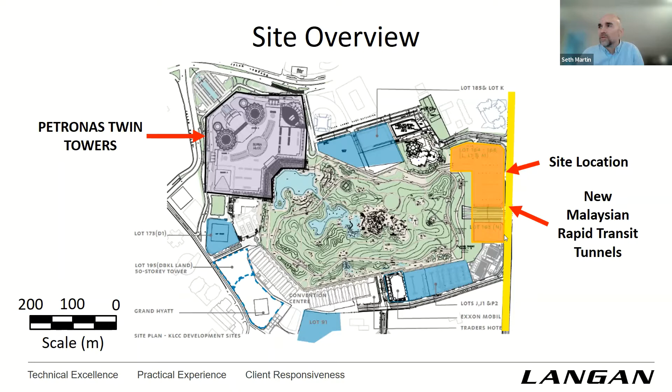One of the big challenges with this site is there's a new Malaysian Rapid Transit system that will be in place — this yellow line running up and down on the screen — that will be in place when this tower is constructed. So that was a big challenge from an overall site constraints perspective. We'll get into some of the other challenges with the overall ground conditions.

So the proposed development — just to go through some of the metrics of the tower itself — it's a 700-meter tall tower, about 150 stories. Total weight of the tower is 9,000 meganewtons. Each of the individual mega columns around the perimeter will each have 400 meganewtons. So the scale of this is pretty incredible.

The system is a piled raft. We have a 70-meter square, 5-meter thick reinforced concrete raft over a field of 137 2.5-meter diameter bored piles, ranging anywhere from 60 to 105 meters below the bottom of the raft, and up to about 125 to 130 meters in some cases below existing site grades. So some of the deepest piles in the world.

The current status is the tower is not constructed. The foundations are all in, the basements are all excavated, and at this point there is a pretty long horizon for constructing the tower itself.

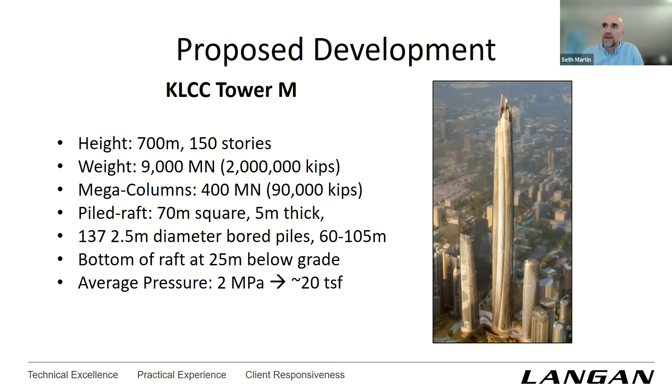Overall, the MRT had very specific criteria that we had to meet. So we're putting in this massive tower, massive foundation system, and we have to look at how that's going to affect the tracks and the overall structure itself.

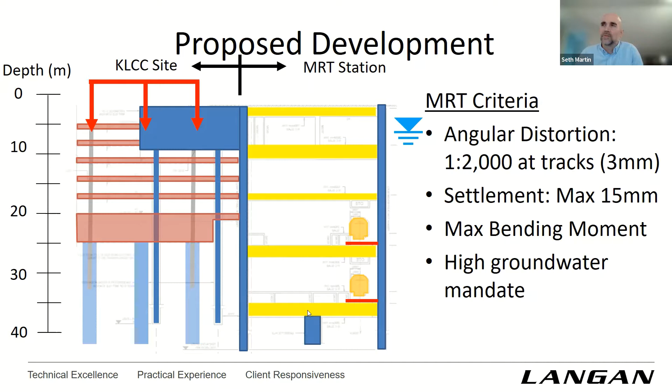We had settlement criteria, angular distortion criteria here listed on the right-hand side. We were looking at the overall surcharge and bending moments and shear forces in the diaphragm wall here. And then we also had to look at how the groundwater levels at the site would affect the overall performance of the structure. So a big first piece for our approach to a project like this is the site characterization.

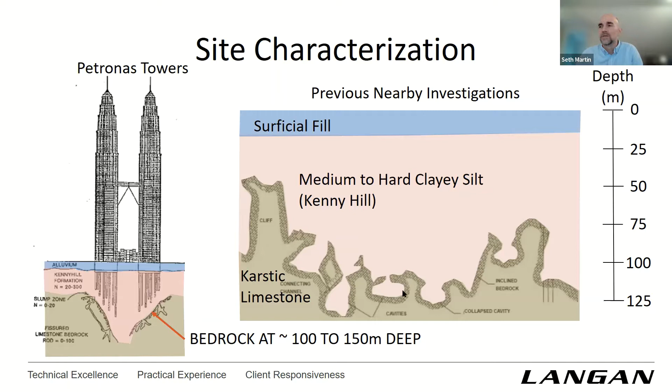We know from previous work at the site and published work with the Petronas Twin Towers that this is a very challenging geological condition. There is a karstic limestone that underlays the site, and this limestone is essentially water soluble, so it's going to have various erratic profiles and cavities, rock pinnacles. We've seen towers at other sites where there's rock drop-offs as much as 50 meters within a single tower footprint. So very challenging conditions — that's going to require a robust upfront site characterization.

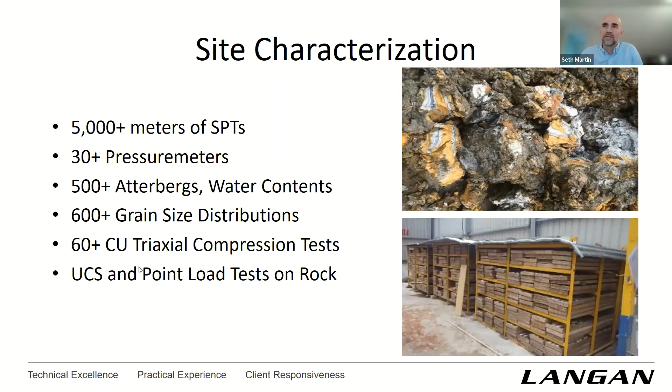Just again, some of the metrics of the overall site characterization here — we had 5,000 meters of SPT drilling, pressure meters, and obviously a wide range of lab testing: strength, compressibility, and index testing.

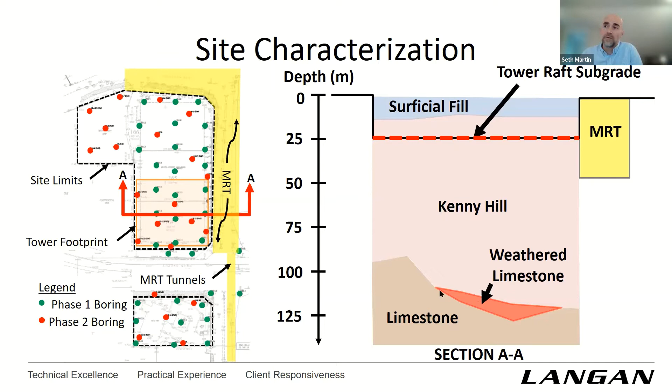Through that investigation, we identified this weathered limestone layer, or what we thought was a weathered limestone layer, across the tower footprint. The key here is we then proceeded with the analysis, proceeded with the design, and ultimately got into a construction phase investigation.

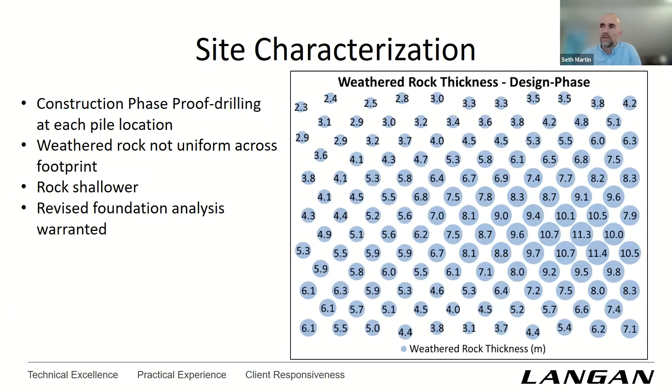Through the construction phase investigation, two pieces there: one, this was a different contractor, and two, it was generally just a better quality investigation. So what we found through doing these proof drilling points at every pile location was that the weathered rock was actually very sporadic.

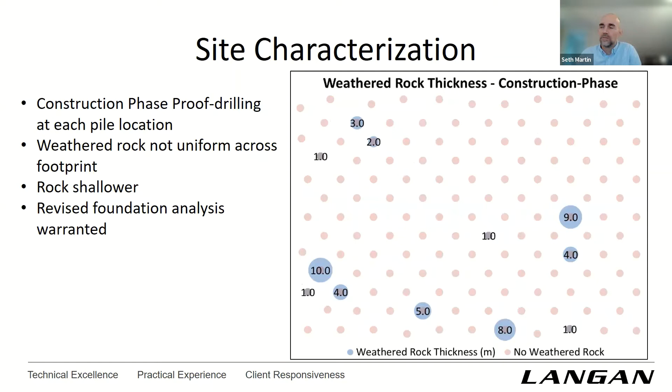And it was not a consistent profile across the tower footprint. And so the key there is that this is going to obviously affect the overall tower performance, so that had to be evaluated prior to drilling of all of the production piles. Overall, it was a savings in the scale of the drilling.

Here we're showing the estimated pile lengths based on the proof drilling versus the original estimated design pile lengths from the original investigation. Any of the negative numbers indicate a reduction in the overall pile length. Here we saw rock was a little bit shallower, quite a bit shallower, up to say 18 to 20 meters shallower, and here rock was a little bit deeper.

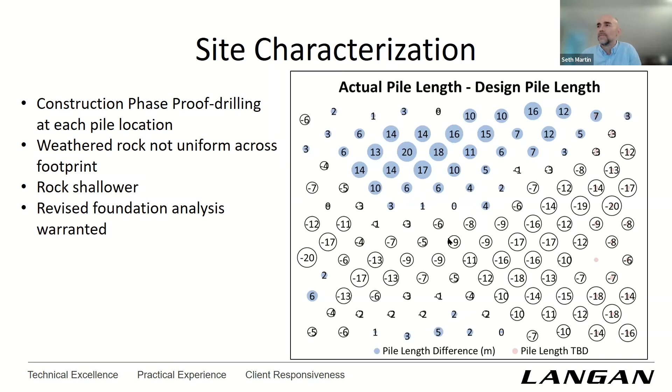So again, this warranted additional analysis, but overall this was very beneficial to really fine-tuning the production pile drilling quantities.

And the overall takeaways, just to put numbers to it: we ended up with 400 meters less of pile drilling than what was originally estimated based on the design phase investigation. Another big takeaway was this weathered rock zone was essentially non-existent except for some very local areas, and that resulted in a softer raft response.

Which was again very, very important to evaluate prior to construction. So we did observe additional settlement in our analysis, and that put an increased demand on the raft, so this had to all be accounted for just ahead of the production piling. Thankfully, the settlement criteria at the MRT was still within tolerance.

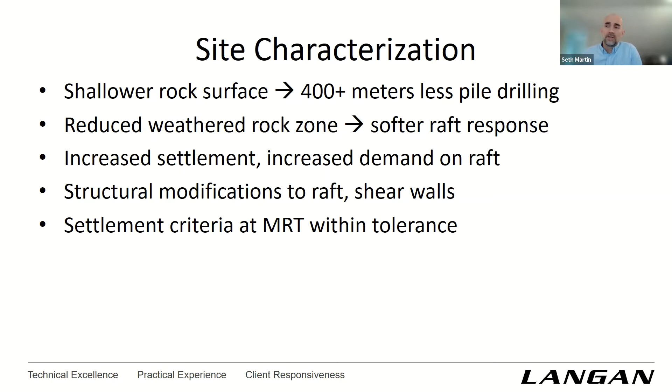So we'll get in now to how we evaluated the tower's foundation performance and what our overall approach there was. Here's a snapshot of our Plaxis 3D model. The tower was evaluated through Plaxis 3D through a wide variety of parametric checks to see just how sensitive the overall performance was to the stiffness of the ground, the rock profile, and the pile length.

The final approach here was to take all of the production piles to 2 meters above the rock, so we would essentially shadow the rock. The lesson learned on previous projects in this same park is that going into the rock presents very serious problems. It significantly slows down the drilling, and you also start to run into issues with cavities in the rock, and you can have a lot of construction issues that come out of that.

So the overall goal was to see how close we needed to get the piles to rock to maintain a performance that was acceptable for both the tower itself and the adjacent MRT station.

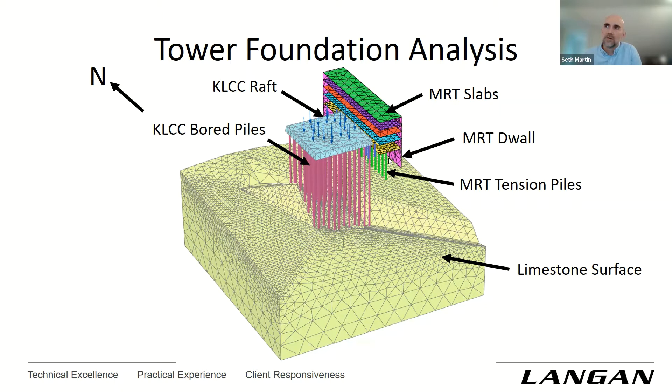So the MRT station here is shown as well, and you can see here that we're modeling this. We've kind of peeled back some of the different elements of the structure to show the different levels. There's a single row of tension piles here below the MRT. So this is the overall model.

And then just looking at the two side by side, this diagram we looked at before, and then how that looks in the actual Plaxis model, and just the layering of the soils and the rock below.

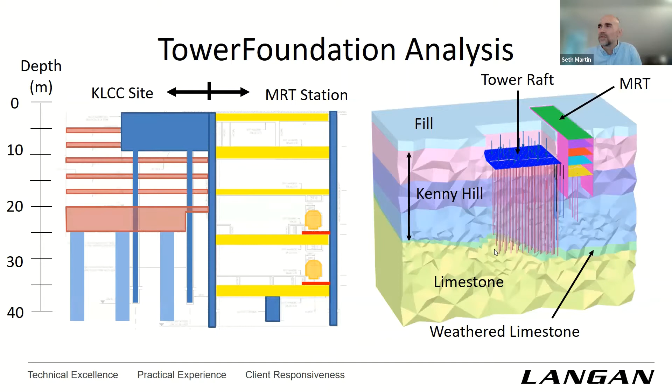And then the overall performance: here we're seeing up to about 95 millimeters of settlement. This was kind of our best estimate of overall raft performance at the end of various analyses working with the structural engineer.

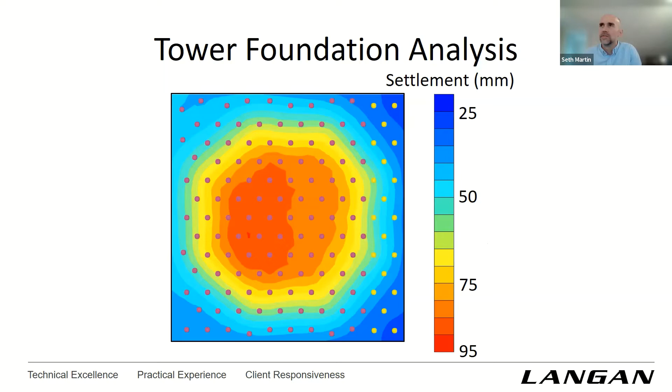And the big key item here is, okay, how is that settlement going to affect the adjacent MRT station? What we looked at is both angular distortion across the tracks, angular distortion along the tracks longitudinally, and are those within tolerance. So we had a very strict criteria of an angular distortion of 1 on 2,000.

So for a track that's 6 meters wide, we're allowed 3 millimeters of differential settlement across the tracks, which is obviously very tight. We also had an overall settlement criteria of 15 millimeters. So very, very tight tolerances, considering that we're seeing up to 95 millimeters of settlement below the tower, and we're restricted to as much as 15 millimeters of settlement at the structure immediately adjacent to us.

So that goes back to just getting to a point where the piles had to essentially almost touch the rock to maintain these criteria.

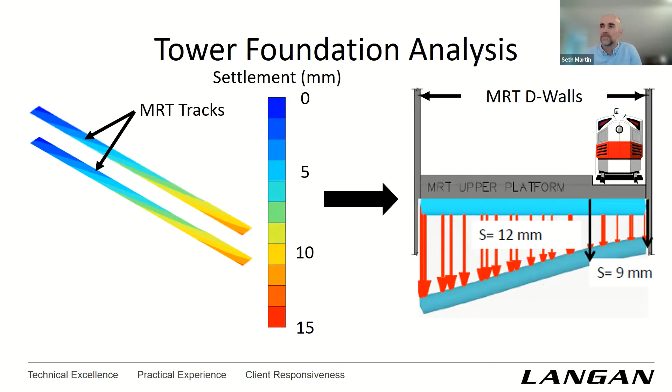We're also looking at the overall pile load distribution and checking how that compares to the individual piles' capacity, both geotechnically and structurally. And then we're looking globally at how the overall piled raft system's capacity compares with the tower's weight. When we look at the combined piled raft capacity, both in bearing plus the individual piles, we're seeing a capacity of well over 50,000 meganewtons.

So we essentially had a factor of safety of 5 on the overall foundation system geotechnically, and then the single pile geotechnical capacities were less. The factors of safety there are anywhere from about 1.5 to 2, higher in some of the corner areas. So the key is that this is not a geotechnical capacity situation, this is a settlement issue, and that's what we were really up against on the design side—how do you maintain these settlements within acceptable tolerances at the adjacent MRT station?

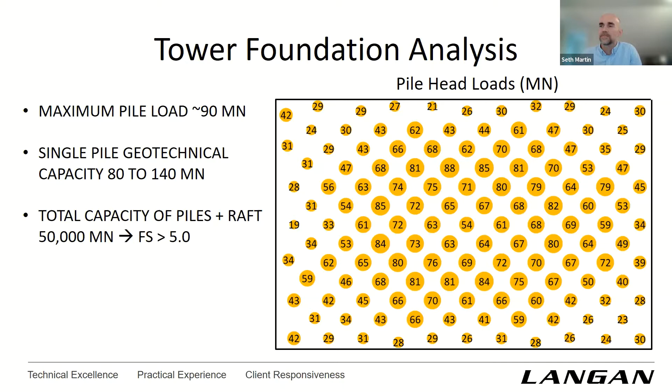So this is a couple of shots from construction. Here's the Bauer BG-72, the biggest drill rig that Bauer makes. These are used to drill these 2.5 meter diameter piles, cast in place bored piles, up to 130 meters, 125 meters below the existing site grades.

So that's the overall story of KL Tower M. The key there is that this is where we're going very deep into the earth to find the rock.

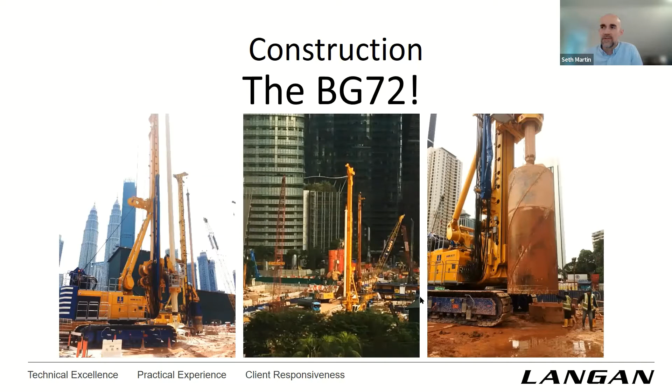Now we're going to transition to New York City, where rock is very close to the surface in most cases, especially in Midtown Manhattan, where One Vanderbilt is—a very different approach. We'll get into the opposite end of the spectrum, a tower that sits directly on rock, and the different challenges we were up against at One Vanderbilt. So again, just to show where we're at in the world, we're now traveling to New York City.

The real challenge here is there's a long history in New York City of various developments over time. We have a lot of very old infrastructure, both in adjacent subway tunnels and old landmarked historical buildings such as Grand Central, shown in this picture on the right. We also have critical utilities that run actually through the site. So what we're showing here in plan view is just an overall site layout.

So we have the site here in red, and just south of the site we have two subway lines that run below 42nd Street. I should take a step back—for those of you who've not been to New York City, this is really the heart of the city. We're right next to one of the main railroad lines, main transit hubs.

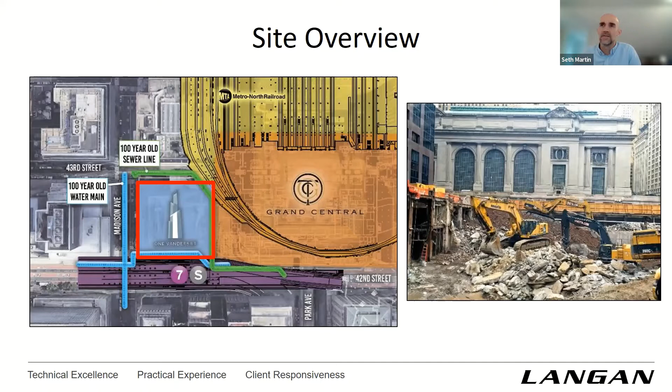So just a couple of pictures of what this looked like mid-construction. Here we have Vanderbilt Avenue, looking east toward Grand Central Terminal, the 100-plus-year-old terminal to the east there. And then we had 43rd Street to the north and 42nd Street to the south.

We're at about the foundation subgrade, so this is about 50 feet below street level. You can see all the various excavators doing some line drilling over here to get the rock out.

What you don't see here, on the east side, behind this wall is active retail space. So we are right up against convenience stores and people shopping as we're chopping rock and excavating down below the footings that support that structure.

At the south, we're right up against the subway terminal. We have two different subway lines that run just on the other side of it. There's one bay of structural framing you can sort of see here. Just beyond that are active subway tunnels that stay in service throughout our construction.

On the north-hand side, we have another active parking garage. So really, three sides of this site were fully functioning New York City infrastructure and retail space. Very challenging there. And what you don't see below this mound of dirt is the Metro North Railroad that runs through the site. That would ultimately be exposed and then incorporated into the project.

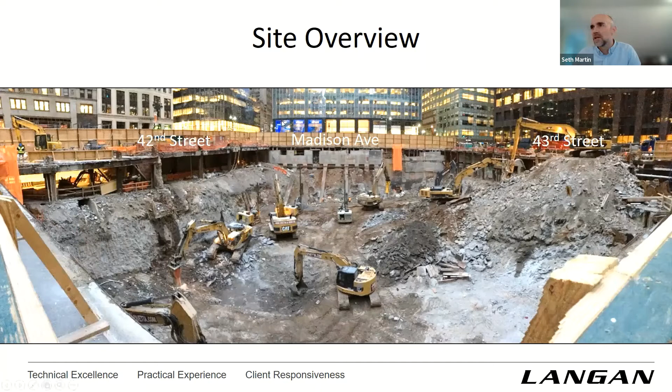Okay, so now if we look at the west-hand side of the site, again, 43rd Street and 42nd Street. Now on this side we have Madison Avenue, which again is a very busy street. This is the one side of the site that actually had real soil retention to handle. So kind of a different set of challenges here, just really more excavating up against existing structures and not so much dealing with the earth.

Okay, so going through the proposed development here, this is actually a real photo. So as it stands today, One Vanderbilt is fully built. I understand it's essentially fully occupied, which is great for the overall project and the city.

Another real photo from today. Okay, so the tower is a little shorter than Tower M. We're at 427 meters tall, so it's still a very tall tower. You can tell here that it's towering over all the existing buildings in Midtown. It will be the second tallest office building in New York City, just behind One World Trade Center.

Construction was completed a couple of years ago. We have below grade connections to the New York City Transit subways, Metro North railroads, East Side Access, which is a new railroad line that runs below Grand Central, and then Grand Central itself. So we'll look at how all those interconnections look today.

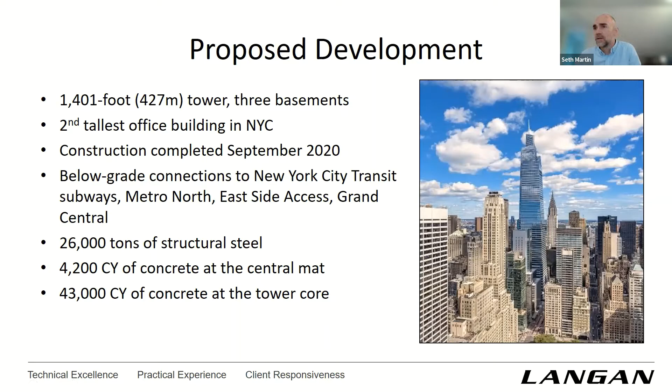And then just some metrics on the overall materials that went into the tower: 26,000 tons of structural steel, 4,200 cubic yards of concrete for the central mat foundation - we'll look at a couple of photos of that later - and then overall 43,000 cubic yards of concrete for the tower core itself.

So this is an isometric view showing the final condition of the tower and all the below grade connections being created with this tower. So you have here one of the subway lines, and we're connecting straight into that. There's a pass through here, and there's also a passageway connecting to other areas below grade that'll provide some additional pedestrian flow.

And then we have connections into the Grand Central retail space. What you don't see is there's another connection over here at the north into the lowest level, which is at the East Side Access mezzanine level, about 50 feet below street level. So really just a huge improvement on the overall dynamics of this area of town, helping to create all this interconnectedness between the various structures.

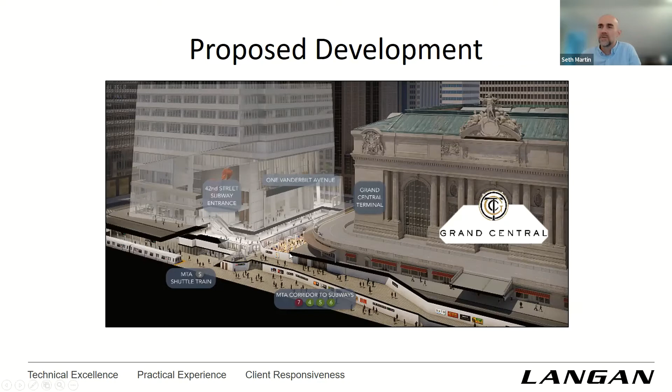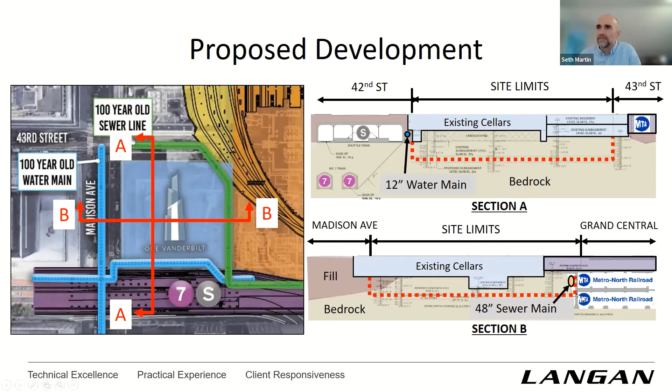So again, our first step in the whole process is the site characterization. Here, the investigation was a little bit more straightforward because we are on rock. We're not dealing with very deep foundations here.

We had a series of test borings, and the key here was test pits. We would actually excavate a small area, say 1 meter by 1 meter, maybe 2 by 2, to expose the perimeter foundations of some of these adjacent structures. We were advancing probes through the perimeter foundation walls to understand the relationship between our existing walls that were being removed and the adjacent structures' walls, whether that was a subway tunnel or this Grand Central retail space to the east, so that we could inform the contractors of the conditions and deal with how to approach these very sensitive areas.

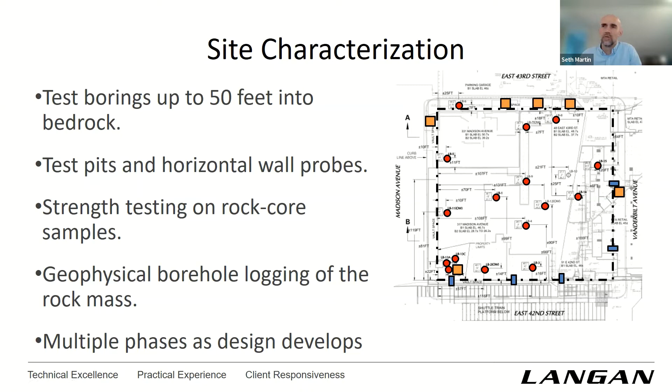We did do some more advanced geophysical borehole logging. So what we would essentially do is send a probe down the borehole, and this probe can map the in situ rock fractures and foliations. Here's a couple of photos of the rock core boxes, and you can see just from looking at this that the rock is generally very competent, sound bedrock. But we wanted to really evaluate, out of all these fractures, how much of these are mechanical breaks from the drilling, how much of this is in situ, and if it is an in situ fracture, what is its orientation with respect to the excavation face?

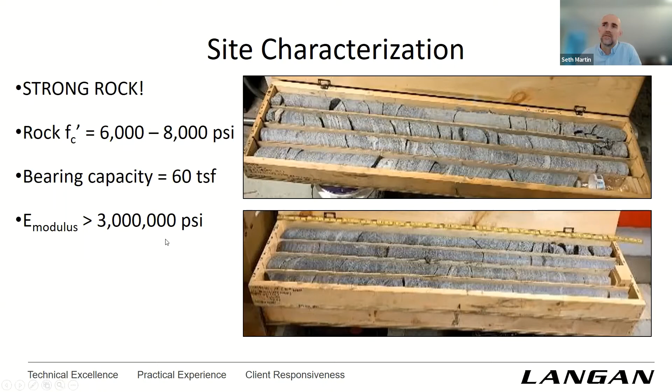Are there any areas where we're going to be dealing with potentials for rock sliding below some of these adjacent structures? The overall rock was extremely strong, as strong as concrete, if not a little stronger in some cases. We were seeing compressive strength of the intact rock of 6,000 to 8,000 PSI. Typical concrete in New York City is around that same range, say 5,000 to 8,000 PSI. And we had bearing capacities, recommended bearing capacities for the tower of 60 tons per square foot. Then the modulus we would measure as well through some of this testing to evaluate the overall expected settlement of the tower.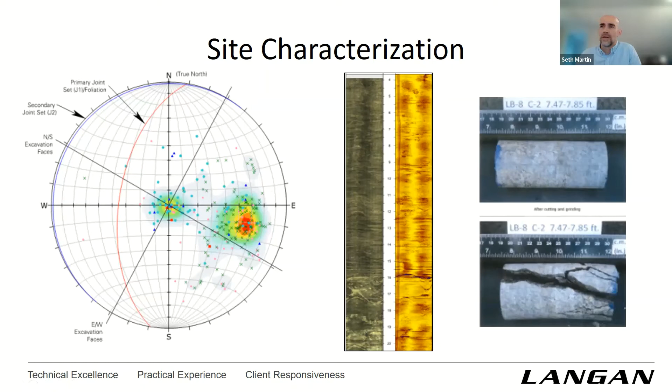So getting into the tower foundations, again here, very different situation. We have shallow rock. So we're not so worried about settlement, and we're not so worried about overall bearing capacity because we know the rock in New York City is very strong. Here, really, the challenge is...

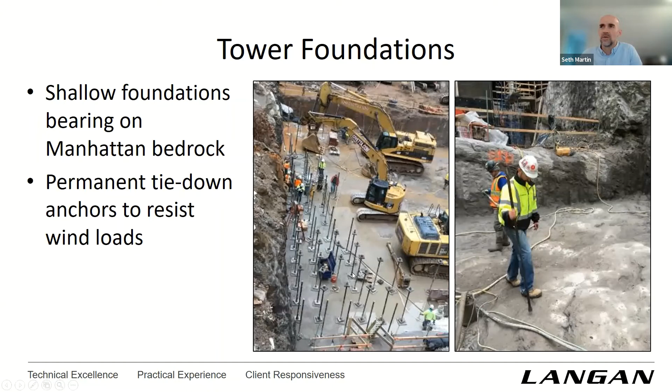Holding the tower down. So we have a series of tie-down anchors. There was one quadrant of the tower mat that was identified as an area needing uplift resistance or tension resistance. That's this cluster of tie-down anchors here, and each one of these anchors can take 350,000 pounds. I don't know what the conversion is off the top of my head with that, it would be in meganewtons, but each of these anchors can take quite a large load. So we would end up testing each of those. We'll get into that now.

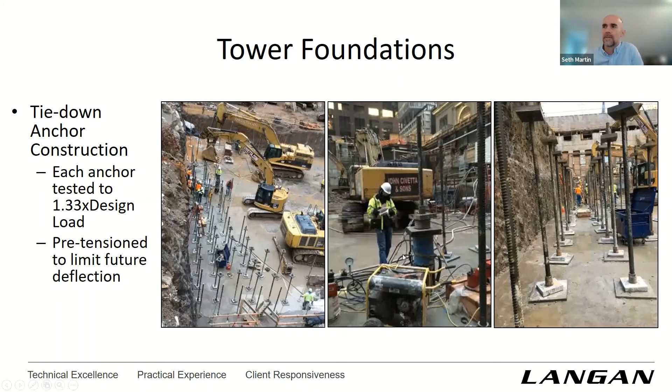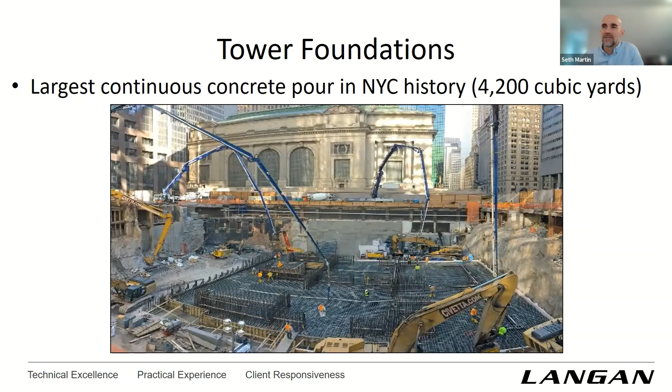Here's a cool photo of the overall mat pour. This is the central mat for the tower, and this was reported to be the largest continuous concrete pour in New York City in its history. Unfortunately, since then there has been one other pour that we know of that's exceeded it, but at least at the time, it was the largest. A cool shot - you have Grand Central Terminal in the background, and you can just imagine the logistical effort that went into getting roughly 400 concrete trucks into the heart of Manhattan. It was about a 24-hour period where these trucks were cycling in and out getting this all constructed. So really a pretty amazing feat, and it gives you an appreciation of what we're up against in some of these very dense urban conditions with getting these towers built.

So overall takeaways for us: the first phase of any tower foundation analysis and design is to characterize the site. But the key is to appreciate that the site characterization doesn't stop when your last boring is complete. Really, we're characterizing the site no matter what the foundation type is, even through construction - whether that's proof drilling at deep piles or mapping the rock in the field. We have engineers on site who are looking at the rock and understanding if there's any areas where we need additional rock stabilization, any areas where maybe rock is more weathered than we expected, and really just appreciating that observational approach through construction.

And especially with Tower M, this advanced modeling really brought a lot of value to the project, just being able to fine tune the pile lengths and keep those piles out of the rock to avoid all the various issues that go along with that, and being able to demonstrate that the tower performance and the MRT criteria are still satisfied without having to take those deep piles even deeper into rock.

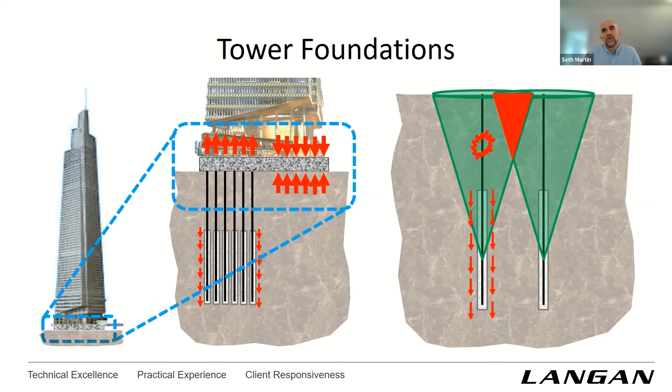Shoring you have already addressed. Did you use partnering with various entities of the project? I guess I'll just speak for Langan. So for One Vanderbilt, we originally were working for the developer, and through the construction award process, when they brought on a foundation contractor, the foundation contractor had some ideas on how to modify the shoring system. So we worked with them to get to a point where those shoring approaches could be implemented, working with the agencies to go back and get those approved. So yeah, I would say that was a partnering process and actually very helpful for the project. We came up with some very streamlined approaches, especially on that Madison Avenue side.

Okay, so the next question is, was there a baseline report you referenced to deal with variations in quantities and timelines?

So a baseline report, I'm wondering if that's related to the monitoring. Yeah, most likely. There were baseline vibrations and optical readings taken, related to the KL Tower, where there was an initial estimated pile length that was ultimately refined through the construction phase proof drilling. I hope that answers the question.

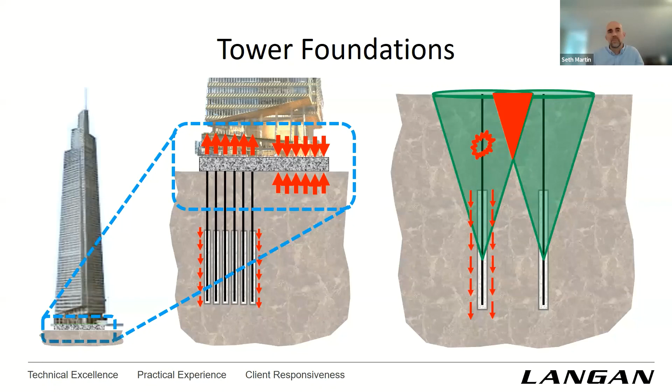In terms of challenges we faced with varying quantities and timelines, especially with KL Tower, some of those piles, even through proof drilling with the updated rock profile and estimated pile lengths being refined throughout the process, there were still surprises when we got out there drilling a small diameter borehole versus a 2.5 meter diameter borehole. So there were still some challenges we had to work with. We had a person on site full time, and the local engineer of record also had representatives on site. So as those challenges came up, the engineers on site with the contractors would work through those issues.

Okay, I think we can quickly take one question before we conclude. Was there any post-construction monitoring on both sites? How was the variation between the observed and computed values of load sharing by piles? So the tower is not built yet, so that's something we'll have to get an update on at a future date. Hopefully in the next 10 years or so.

Now we'll just take a final one. Was there any dewatering in the NYC project? Very minimal. The rock in New York City is very, very tight, at least in this area, so there was very minimal water to deal with beyond incidental rainwater and some leaking utilities around the site, but no global dewatering system, thankfully.